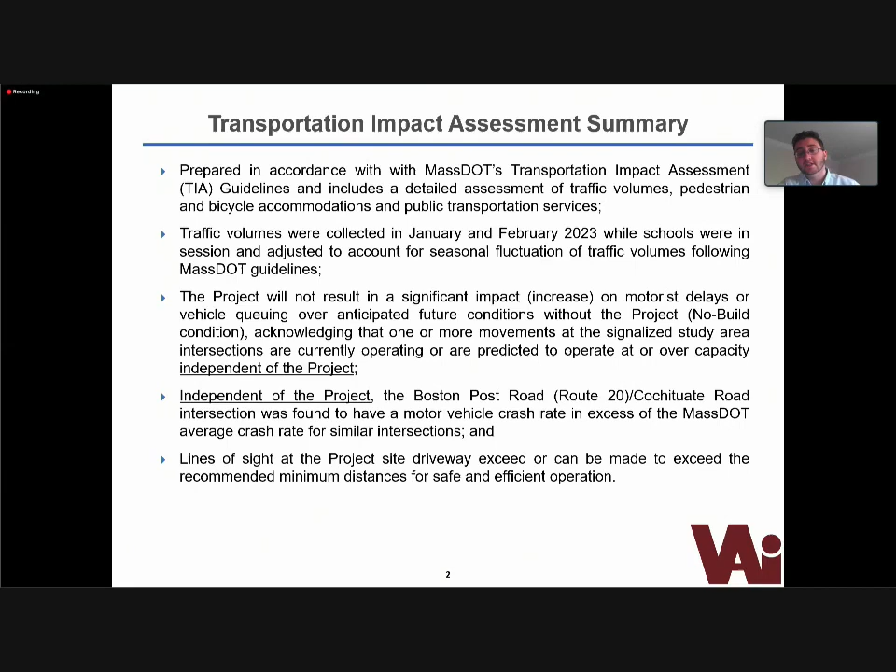We have recommendations within the traffic study as they relate to both of those last bullet points, and lines of sight at the project site driveway and the emergency access roadway to the north of the proposed building were found to exceed, or it can be made to exceed, the recommended sight lines to function in a safe manner.

Here you're going to see a graph showing the study area and the existing conditions: sidewalks, crosswalks, lane use, and dimensions. We looked at the two signalized intersections of Boston Post Road, Route 20 at Cochituate Road, and Old Connecticut Path, Route 126 at Old Cochituate Road.

Both are signalized intersections. We also looked at the unsignalized, or stop-controlled, existing driveway to St. Ann's Church, where all of the traffic for the project will be entering or exiting.

As I said earlier, the traffic volumes we used were conducted in January and February of 2023, and in accordance with MassDOT standards, which requires that we adjust those volumes up to average month conditions. We brought them up by approximately 6% to get them to average month conditions.

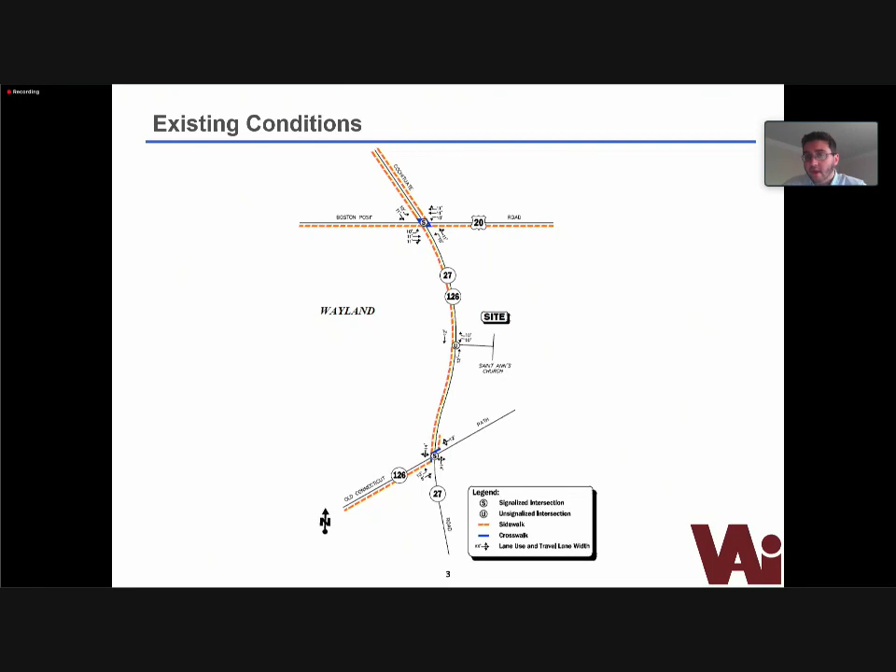With that adjustment in mind, Cochituate Road itself carries about 10,000 vehicles over the course of an average day, with about 1,200 to 1,300 during each of the commuter peak hours. So that is your one peak hour between 7 and 9 a.m., and your one peak hour between 4 and 6 p.m.

Then getting into the trip generation of the project, how many vehicles it is expected to generate, based on data published by the Institute of Transportation Engineers, or ITE, who has conducted numerous studies over many years all across the country, using specifically their land use code for senior adult housing multifamily, which is the proposed use for the project.

It is estimated that the project will generate about 200 vehicle trips, 194 over the course of an average day, with around 12 during the weekday morning peak hour and 15 during the weekday evening peak hour.

It is good to note that these trips are one-way. So a vehicle that leaves in the morning to go to work, per se, and arrives home in the evening counts as two trips. And then if we look at those peak hour trips, taking a step back and looking at the bigger picture,

those really come down to one new trip in the area on the roadways every 4 to 5 minutes, which is not a level of traffic that's going to be perceivable to the average person who already traverses the roadway.

And if we jump back to those numbers I said relating to the existing traffic on Cochituate Road, with about 1,200 to 1,300 during each of those peak hours, it represents a 1 to 2% increase in traffic. So it's very minimal. Senior adult age-restricted housing, when you look at a lot of land uses, is not a very intense trip generator,

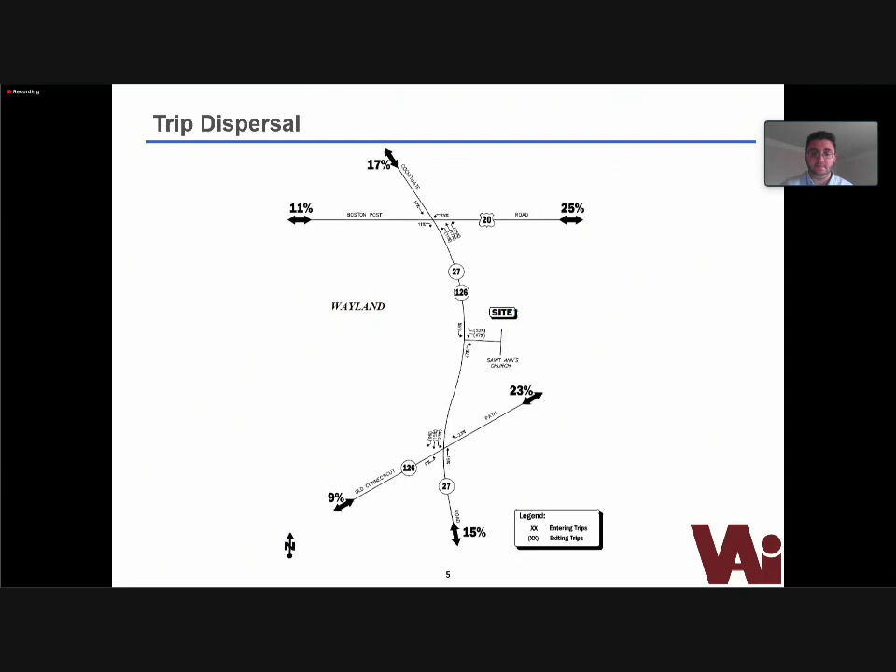As I did state previously, the northernmost intersection, Route 20 at Cochituate Road, is operating at or over capacity currently, and there are recommendations later that we have made to address that.

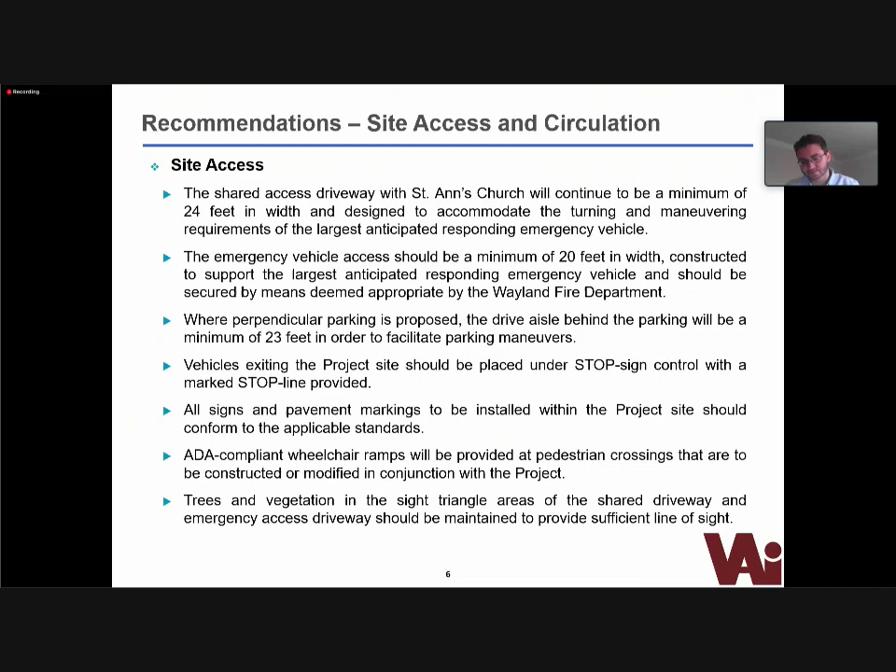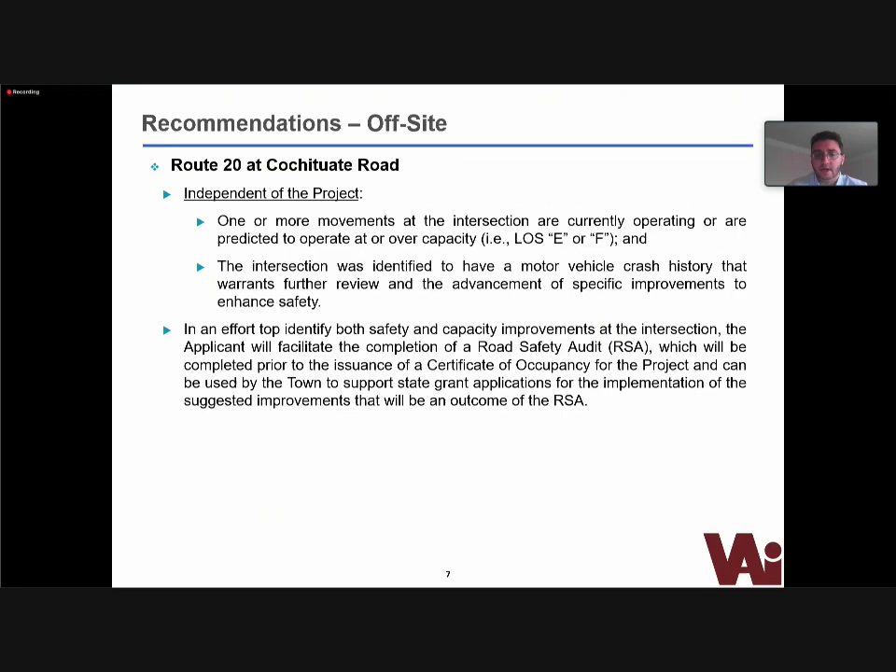Our recommendation at the Route 20 at Cochituate Road intersection addresses both the safety concerns and the capacity issues. We recommend that the applicant facilitate the completion of a road safety audit, which will produce a variety of suggested improvements, some short-term and low cost, some high cost and long-term, that the town can then use to support state grant applications to construct those improvements.

And then the last bit of our recommendation was on a transportation demand management program. These are simple and essentially there to try to encourage residents to not use vehicles, the main one being someone assigned as a point of contact with the Wayland Council on Aging. I appreciate you for listening to my probably longer than you had hoped spiel about the traffic study, and I'll be here to answer any questions the board may have. So thank you.

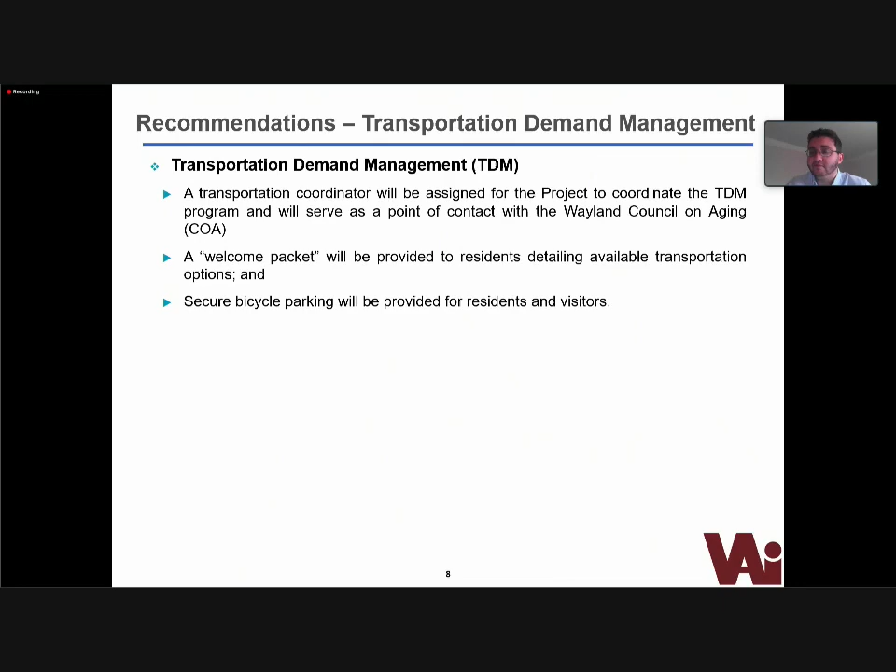Anybody from the board have any questions before we hear from maybe our peer reviewer on this topic? No? We're not hearing from anybody on traffic in the town? Not at this time. Well, I'm the peer reviewer, so I thought you'd want me to.

I have one question about the stop sign issue. I didn't understand, was that the stop sign actual sign or a marking on the asphalt? Both, yes. Okay.

I have a question. I think I was hearing that you were going to try to coordinate with the Council on Aging. Is that to provide bus transportation? When you mentioned coordinating with them and trying to reduce vehicular travel, is that the intent? Yes, I believe, and you can correct me if I'm wrong, but the Council on Aging has some kind of on-demand pickup with buses. That's pretty common in many towns. So that would be the focal point of that connection to facilitate that.

My further question is, this location is halfway between Route 20 and Route 30, and the population intended to be renting here is of the more mature age. I don't know how on-demand the COA vehicles or transit could be, but for people to really get out and about, this is not a walking area. It's more of a biking area, but it's a place where somebody needs immediate vehicular access if they're living alone in an apartment in an area where you have to walk a couple of miles one way or the other to get to a store or anything else. How is that being considered in your study?

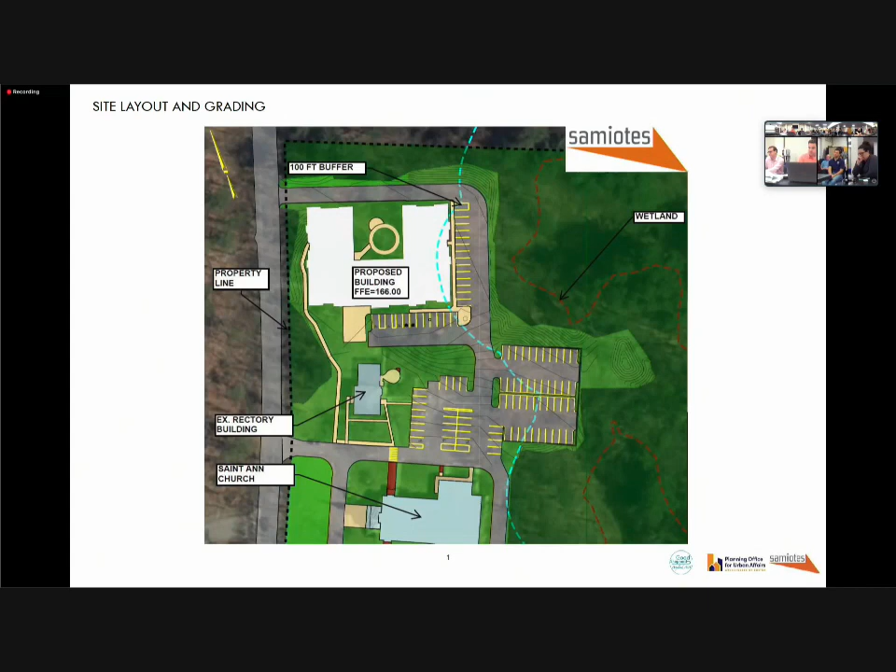Next sheet. So this shows existing conditions. We can start there. You can see the 100-foot buffer is that blue line that works its way through at a farther distance, showing the wetlands that starts from the north there.

There are two wetland series: one further to the north with a 100-foot buffer that works its way into the Windy Hill development, and one to the south that reaches the MWRA easement all the way to the south. Really, those are the two corners of the wetland system itself.

The 100-foot buffer, as stated, is shown here. You can see where it jumps into the site, and it goes across the back of the driveway behind the church.

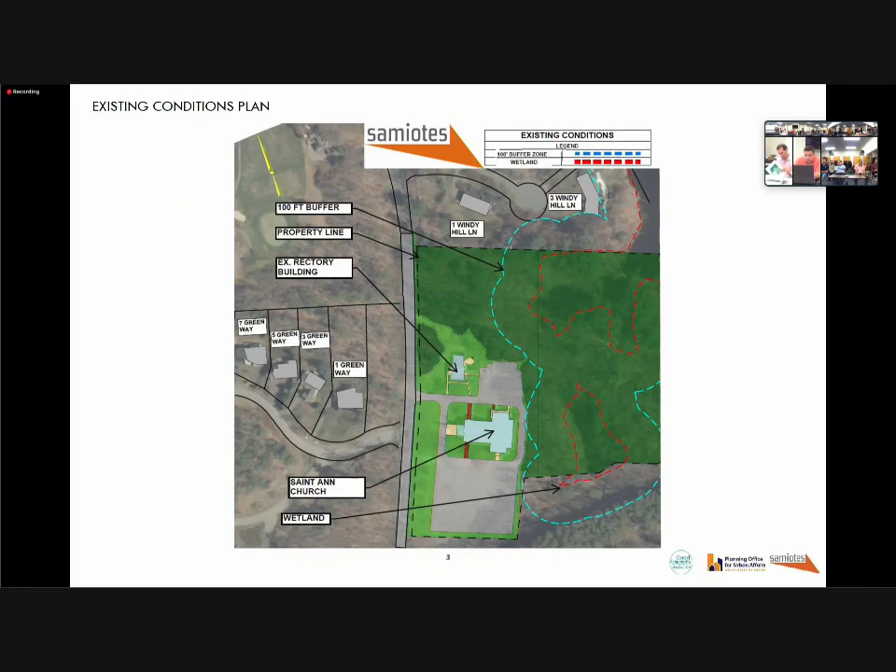If we go to the stormwater, it might be a good one to show on. Here you can see the 100-foot buffer just clips into the proposed building and a portion of the parking on the right. The septic system is going to be shifted out of the 100-foot buffer.

With a lot of moving parts, we want to make sure we've finalized the second set of wetland observations to meet the Concom's requirements. We believe this line is now steady, and we're going to be submitting that to conservation when we do our filing, but we weren't sure which way it was moving.

Most of the project is staying out of the 30-foot no-touch, which is the bylaw. There are some areas where the peer reviewers suggested maybe we try to move in a bit with a wall that will still protect the wetland but give a little more space for other things. We're trying to deal with the limited space for the site as the building moves close between the church and the rectory, and we end up with that kind of triangle of area between everything.

The stormwater is controlled in such a way that you will have a water quality better condition than currently out there, meeting the stormwater management policy. You will not have an increase in the peak rates to the wetlands for all the required storm events.

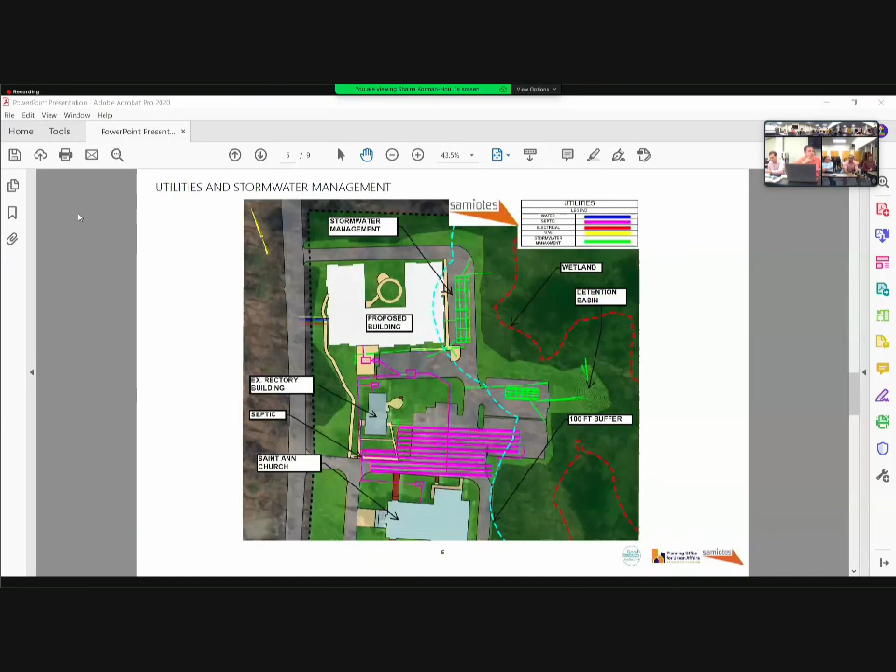Again, I think we've gone through stormwater. We're going to meet the stormwater regulations for both water quality and water quantity - those are two big things. And as Sean said, there's a number of metrics we're required to hit, and the state has set certain standards. They've done testing through the years to illustrate that this type of BMP, or best management practice, like a catch basin with a certain sump and a hood, will remove this amount of suspended solids, and that you get this much credit for a detention basin or an infiltration system.

One of the things we're going to do here is ensure that we're pre-treating before we even infiltrate, so that in addition to helping the water quality, you're also helping protect and lengthen the lifespan and capacity of the infiltration systems themselves.

Excellent. I don't know if there's any further comments or questions on stormwater. One quick thing to note too - as part of their approval with Conservation Commission, they're going to be required, as part of their compliance with the stormwater standards, to provide what's called a long-term operation and maintenance plan. So along with all this great design and work in constructing these systems, it's equally important to maintain them.

They'll have to come and provide a plan that talks about every element of the stormwater system and what needs to be done every year to maintain it so that it operates the way it's supposed to forever. Then the board can condition them to provide a report every year, or some other mechanism, to make sure they're following those commitments.

Great, thank you. And I think those were the intended topics for tonight, but I did have a question myself.

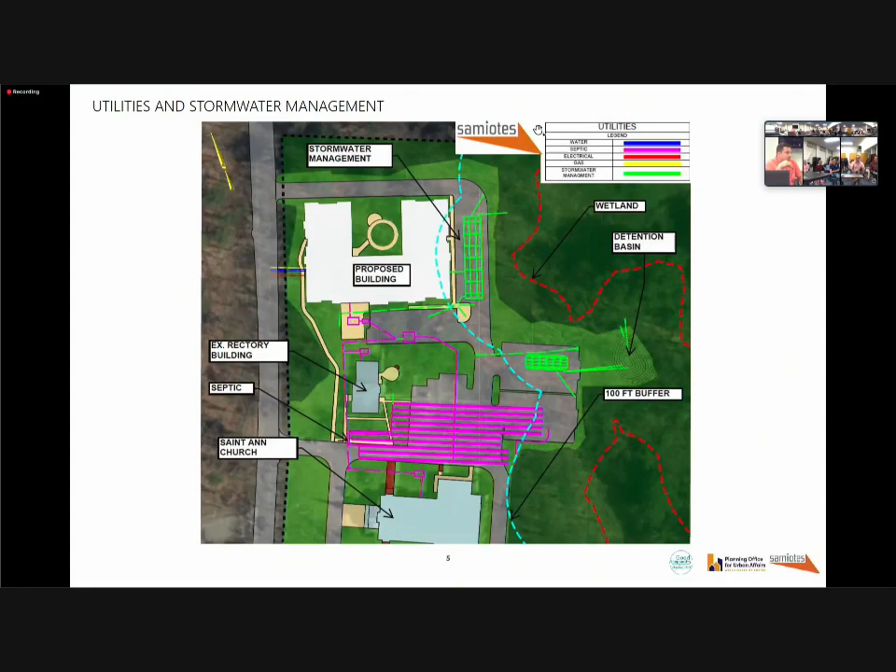So we're going to be speaking with the church. Obviously this has not gone to bid - there's no general contractor. We will look at ways to do phasing. We're always concerned about affecting the means and methods of the contractor, but I do know there was a question, so we will address it and come up with a way of illustrating how this can be opened up so you don't have the entire site open at once. That's something we want to ensure right off the bat, as one example.

Yeah, and what I'm hoping for is just some general big picture things. For example, we talked about your plan for how you stage the septic system construction - that there'll have to be some sort of a tight tank scenario while you're constructing the new system. So just something that sort of is a roadmap, not necessarily a full construction management plan, more of a roadmap or even a phasing sequence on a site plan, but something that gives a bit of a roadmap.

One of the other things - I think there's been some concerns from a number of people in town boards and committees, and townspeople, asking too about if you have a site and you're worried about erosion and control of that nature.

One of the other permits required by the contractor, the site operator, is a SWPPP, a stormwater pollution prevention plan, which goes through the US EPA because we're disturbing more than an acre. Conservation will ask for that. That's another set of eyes ensuring there's erosion control to protect not just wetlands, but the site leaving construction. You're required to do that whether you're next to wetlands or not.